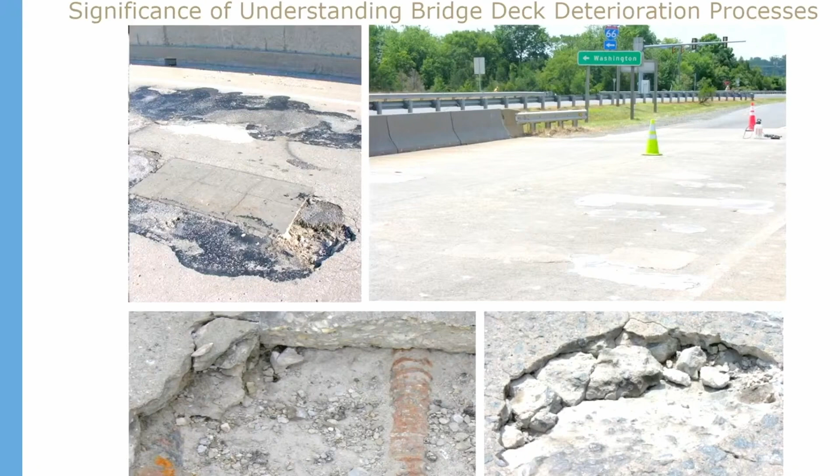So the first question we can raise is why it is so important to understand performance of concrete bridge decks. First of all, because of their direct exposure to traffic and environmental loads, concrete bridge decks deteriorate faster than all other bridge components. Those who are the owners of bridges know how much money they are spending for proper management of concrete bridge decks.

The second reason why we are conducting this research is that the relationships between the performance of concrete bridge decks and many factors listed here are still not fully understood, and we have not developed correlations which could help us in better bridge management.

So the question is, how can we develop better understanding of the performance of bridge decks, not by waiting 30 or 40 years on real bridges, but in an accelerated manner. This is what I will be discussing today.

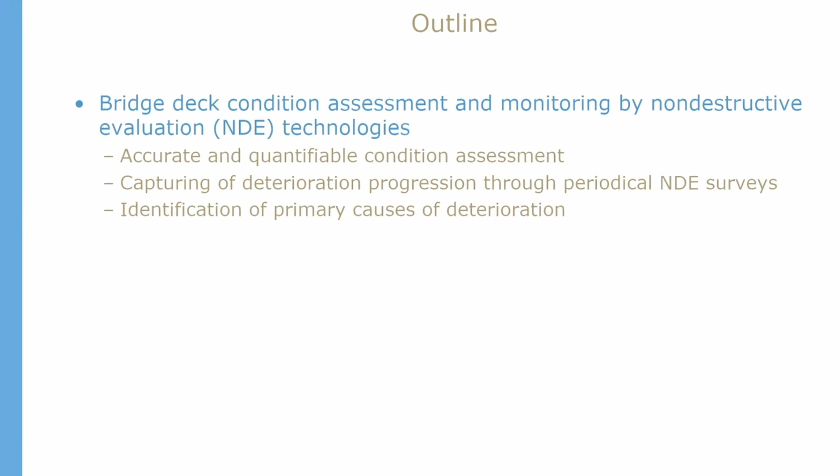There will be three parts of my presentation. First, I will describe how we are doing condition assessment and monitoring of concrete bridge decks using non-destructive evaluation technologies, which are essential to describe the results from accelerated testing. The second part will describe the BEAST facility for accelerated testing. Finally, I will go through the results obtained from testing both the deck with overlays and the bare deck.

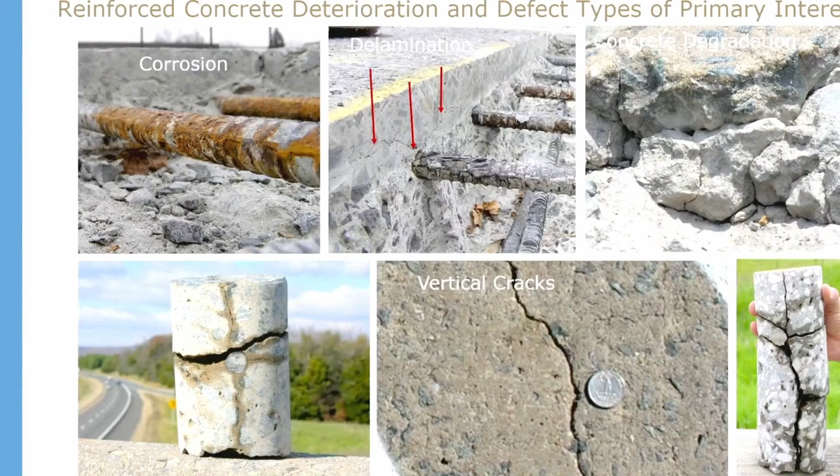So a little bit about how we use non-destructive technologies for condition assessment and monitoring. When we speak about what concerns us with concrete bridge decks, or any reinforced concrete element, these are issues related to corrosion, delamination, concrete quality degradation, and cracking.

To illustrate that they work, here's an example from a long-term bridge performance program we participated in. We collected data on one bridge in Virginia, which we surveyed 4 times within 6 years.

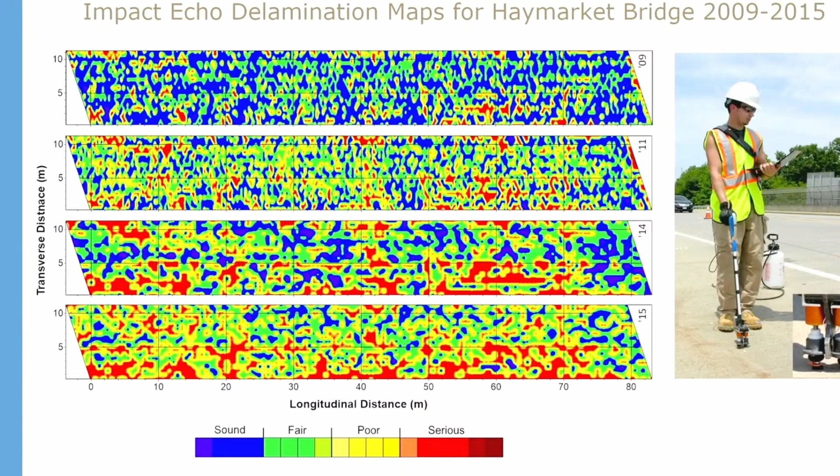Below that is the delamination map. We can say that the primary driver in this bridge was corrosion. But what you're going to see from our results from accelerated testing is that it was not corrosion, it was really concrete quality degradation as a result of repeated live loading.

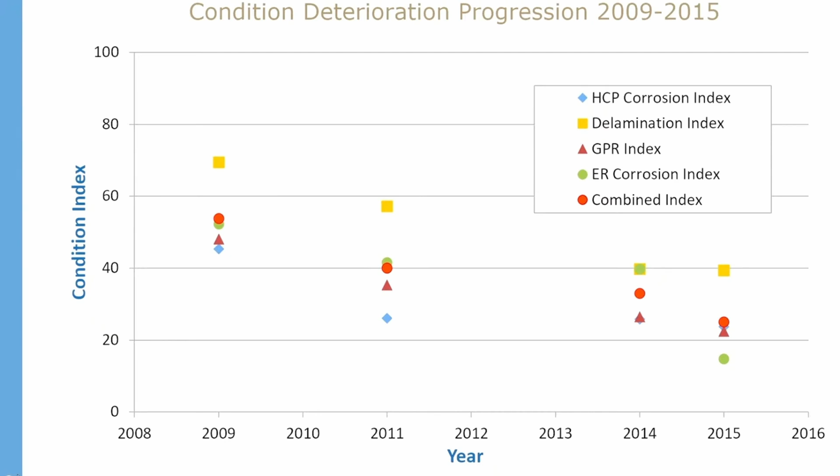So how can we use this information? We can quantify it, and that's the big advantage over visual inspection. For example, we calculate condition indices on a scale of 0 to 100, where 0 is the worst and 100 is the best. This condition index represents a weighted average of the percentages of deck area in different conditions. So for each technology, we calculate a condition index. If you look at this plot, from 2009 to 2015, each of the technologies is capturing the change in condition.

So what I've shown you were the data only for those 6 years, but we always have to think about the life of the bridge. The life of this particular bridge started in 1979. So we don't have any information between the birth of the bridge and when we first tested it in 2009. So there are a few questions we can raise.

The first question is, was it really the initial condition something that deserves a condition index of 100? As you're going to see from our testing in the accelerated facility, it is not truly the case. And we also know this from some real bridges which we tested right after construction.

The second question is about the shape of the curves as shown here, and that's what is missing. Here we can be a little more comfortable because we have those four measurements. But if you conducted only a single measurement, you would probably ask, I don't know how to get from the start to that point.

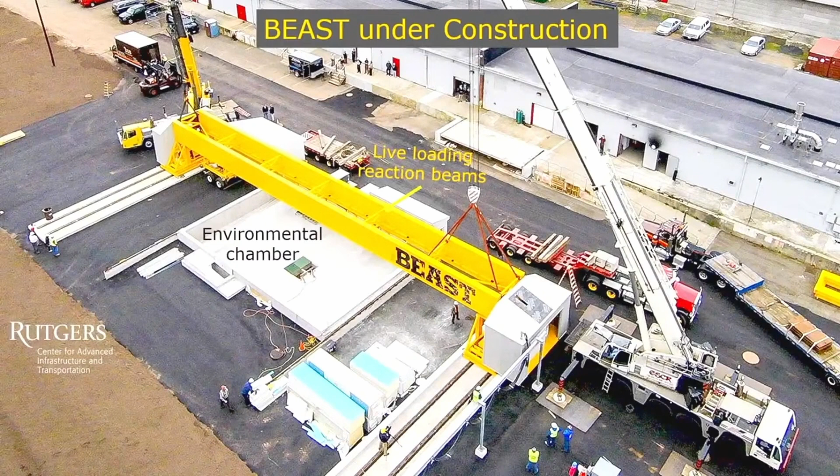So let me speak a little bit about this facility, BEAST. BEAST stands for Bridge Evaluation and Accelerated Structural Testing. Here you can see it under construction, and I'm showing this because it helps me better explain what you do there. First, what it can do: it can accommodate structures 50 feet long, about 28 feet wide, and about 5 feet deep.

You can apply dual axle loading, which can apply loading up to 60 kips. We typically run at 50 kips. And it can do up to 17,000 cycles of loading per day.

You can also control environmental conditions in this environmental chamber, marked here, where the structure is placed. You can control temperature anywhere from 0 to 104 degrees Fahrenheit, and you can simulate winter maintenance by spreading salt brine, which is what we do.

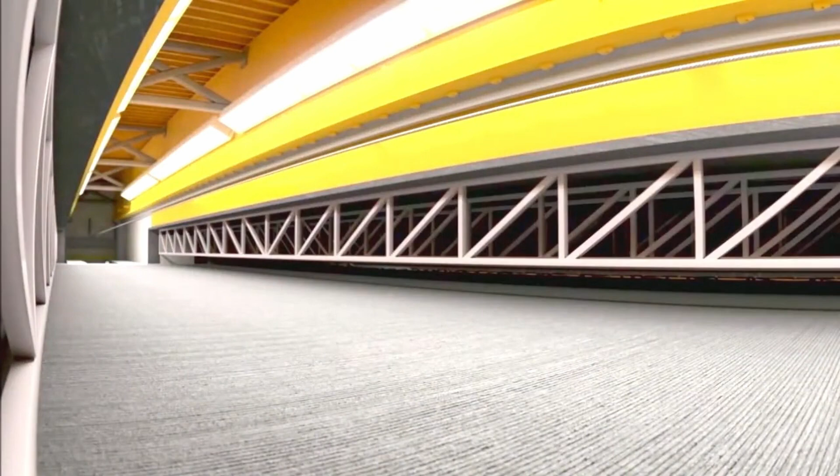To illustrate how this works, we'll start with an animation and then go to the actual bridge. The structure can be prefabricated and just placed into the environmental chamber, or it can be built in place. Our very first structure was built in place. Once it's in place, the chamber is closed, and there's a carriage which moves, approximately 10 to 12,000 times per day.

What's also being done simultaneously is we cycle the temperature. We need to go to about 0 degrees to cause freezing of the bridge deck, and then if we go up, we can go up to 80 degrees. But the goal is to bring the temperature of the deck back to about 40 degrees Fahrenheit. Here you can see the change in temperature, right now heating. As you apply more cycles, you can expect some deterioration.

In a second, you're going to see the carriage, the real carriage, not through animation, and you'll get approximately the feel for how fast it is. So this is the facility. This yellow part represents a reaction beam, and that dual axle load carriage moves along that axis. This white part represents the environmental chamber, and in a second you'll see an open chamber with the carriage running.

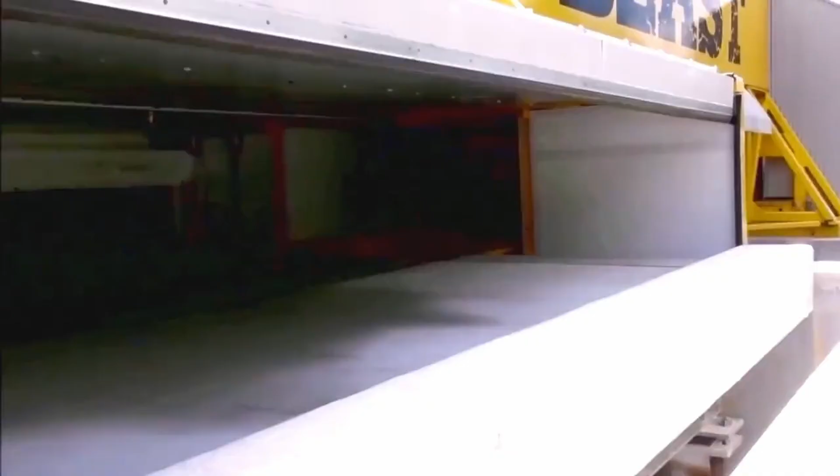So 10 to 12,000 cycles with a certain load. What you're going to see at the end is what we did. We're collecting information about the condition, so the environmental chamber is fully open, and then we deploy a suite of NDE technologies and collect the data. The data is being collected on a grid, 1 by 1 foot.

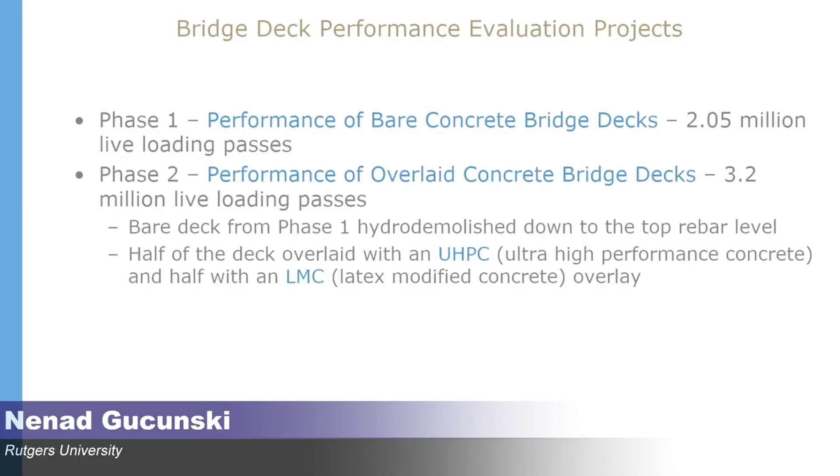So let's speak about the results we obtained on both bare and overlaid concrete bridge decks. We had two phases of testing. In the first phase, we tested a bare concrete bridge deck, which was put under 2 million passes of live loading. In the second phase, which is still not done, we will probably go up to about 4 million passes. The original bridge deck was hydro-demolished to approximately top rebar level, and on one half it was overlaid with UHPC, and on the other half it was overlaid with LMC.

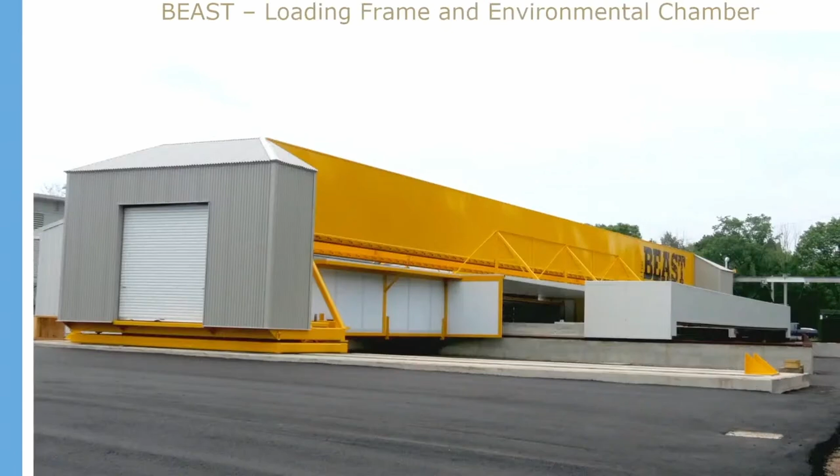The environmental chamber is closed once everything is in place, and that carriage is running.

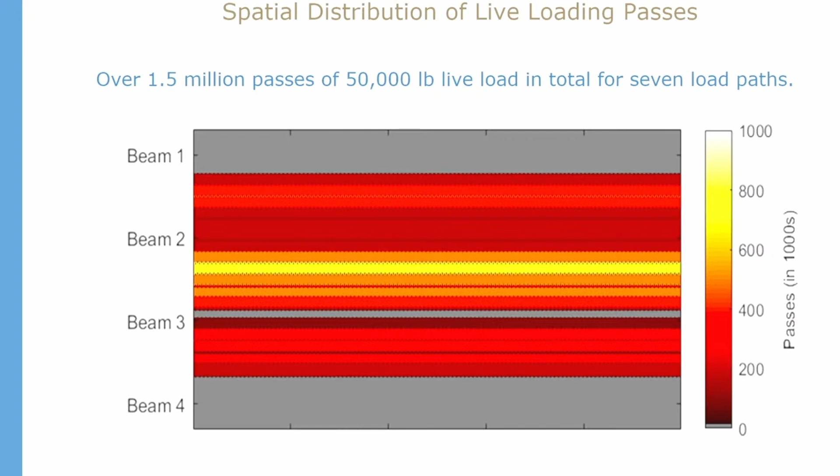That carriage is not moving in only one position. Here you can see that beam moving laterally, and you can see, for example, the distribution after 1.5 million passes. So pretty much, you may say, except for the edges, every part of that bridge deck experienced loading.

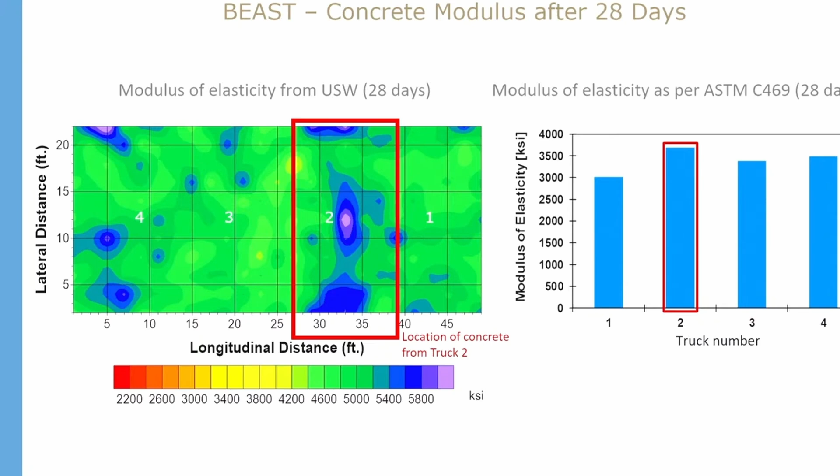So to go back to what I mentioned earlier, the importance of baseline measurements. For example, when this bridge was constructed, there were 4 truckloads of concrete, marked 1, 2, 3, and 4. We took some cores and measured their modulus, but we also used a technology, ultrasonic surface waves, to measure modulus of concrete. What you can see is significant variability in that modulus, but there is good correlation between what was measured on the cores and on the deck itself. So don't expect that you will have uniform material.

Just to illustrate what we would do, for example within phase 1 for the bare concrete deck, we conducted about 15 NDE surveys. I'm showing some of them to show that we are capturing the changes. For example, in this map, you start seeing these yellow zones at 360 days, low modulus - we know from previous experience these are actually signs of initiation of delamination. And that really happened, so those zones, which are in red, later delaminated.

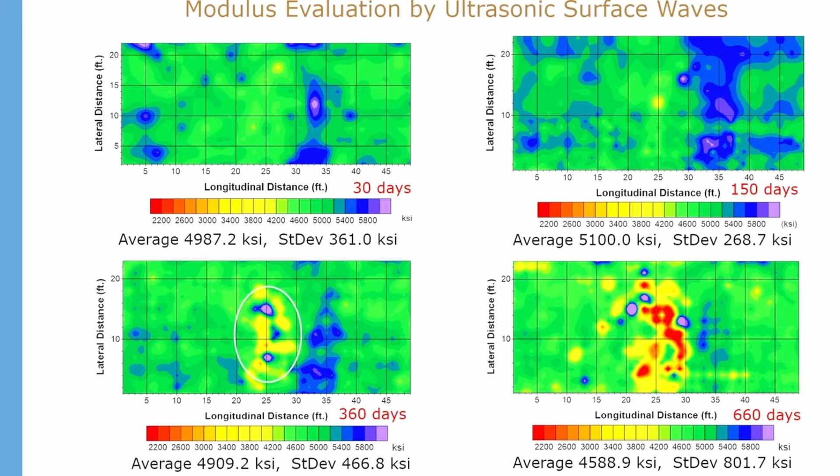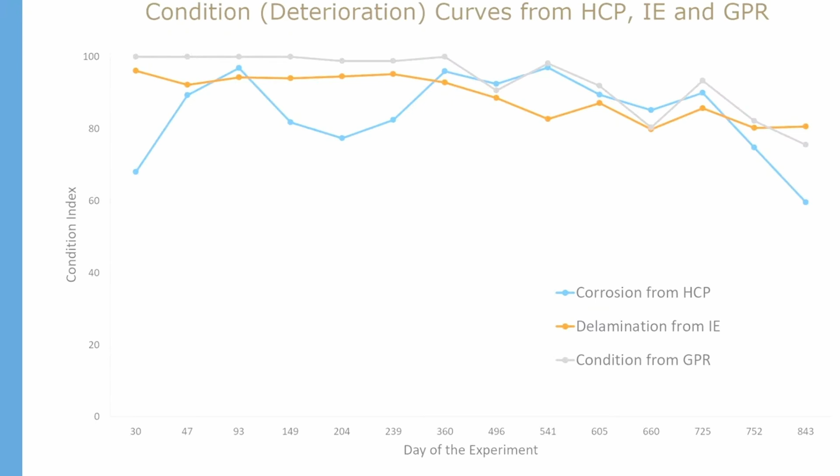Here you can see, for example, some degradation curves for the bare deck. What we can see is the general trend - we did not want to go too far because we wanted to use the same bridge deck for the second part, phase 2, evaluation of the performance of overlays.

What is always important to do is to compare different segments, and this is what we have done in the past, whether it was a big bridge where we segmented it to evaluate and provide assessment of different parts, not just the whole bridge, or if there were multi-spans.

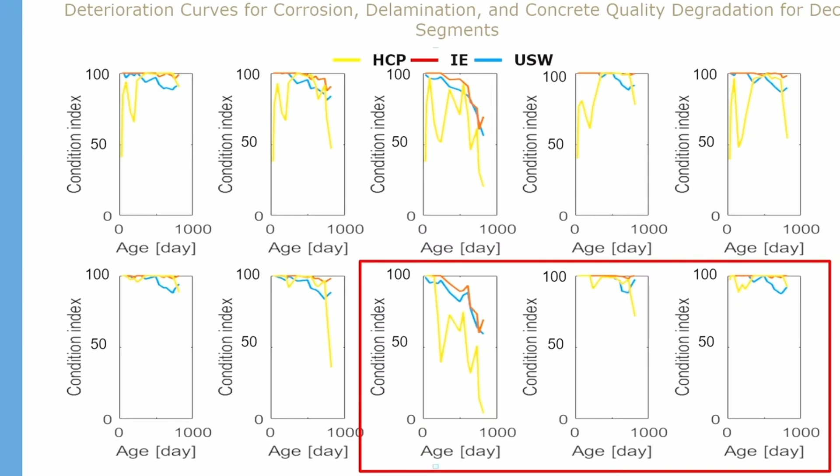Very similar for concrete quality degradation. We are using 2 measures: the first one is the change in average concrete modulus, and the other, even more important to detect concrete degradation, is standard deviation. If you look, there was a significant drop in the average modulus, and equally a significant increase in standard deviation of that modulus. These are clear signs of concrete quality degradation.

Now let us compare the results of the bare deck to the deck with overlays. On top you can see the image of that bare deck after 2 million live loading passes. At the bottom is the image of the deck with 2 overlays after 2.6 million passes. As you can see, while you can observe spalling on the bare deck, there were no signs of spalling on the overlaid deck.

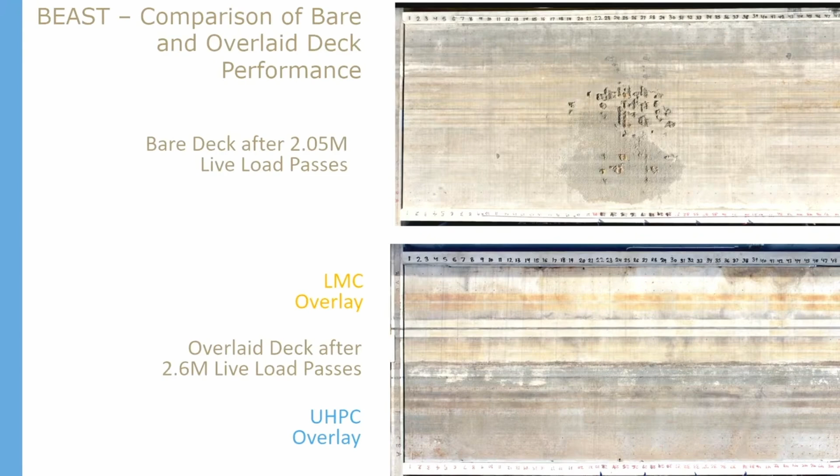Some might say it could be primarily a result of a thinner concrete cover on the bare deck. Well, we measured also on the overlaid bridge deck, and that overlay's concrete cover was maybe 0.05 inches thicker than it was on the bare deck, so they have pretty much the same conditions with respect to concrete cover. Here are just some comparisons.

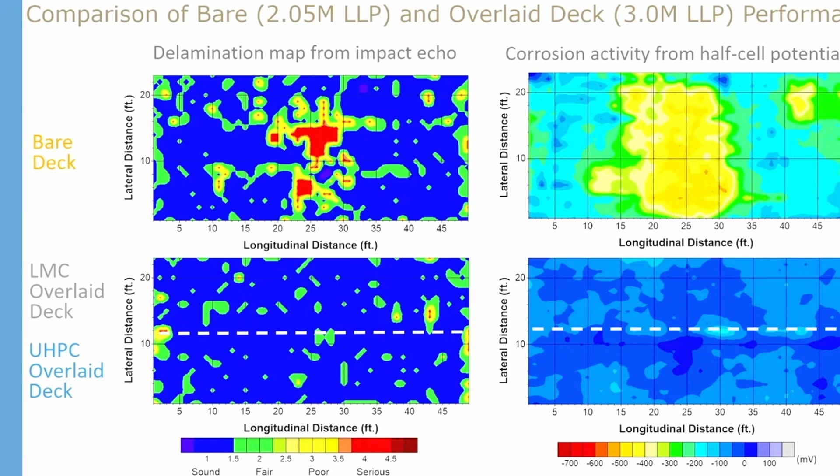On top you can see, for example, the delamination map from Impact Echo and corrosion activity map from half-cell potential. The top two maps are for the bare deck, after 2 million passes. The bottom two plots are for the overlaid bridge deck with 3 million passes, so 50% more live loading passes. With respect to delamination, there are no signs of delamination in the overlaid bridge deck. Similarly, there are no signs of corrosion activity in the overlaid bridge deck.

The average modulus is very steady with very stable standard deviation, which I mentioned previously is typically an indication of concrete degradation - so it was very stable. On the other hand, when you look at the bare deck, that standard deviation was going up and the average modulus was significantly decreasing.

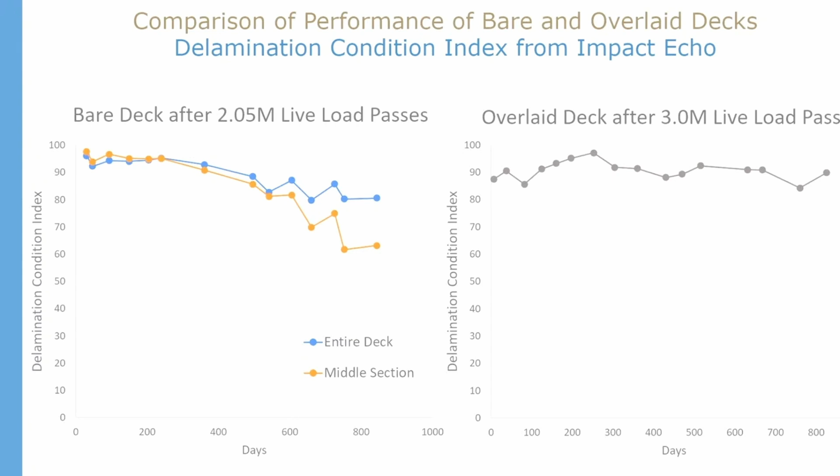So just to make a few conclusions: this bridge deck with overlays has shown significantly better performance than the bare deck, and even with 60% more live loading cycles, there was lower concrete quality degradation, and there were far less signs of corrosion and delamination.

This is in a way telling us that we should think about not just using these ultra high performance concrete overlays for rehabilitation, but that we might think about newly constructed bridge decks finished with UHPC.

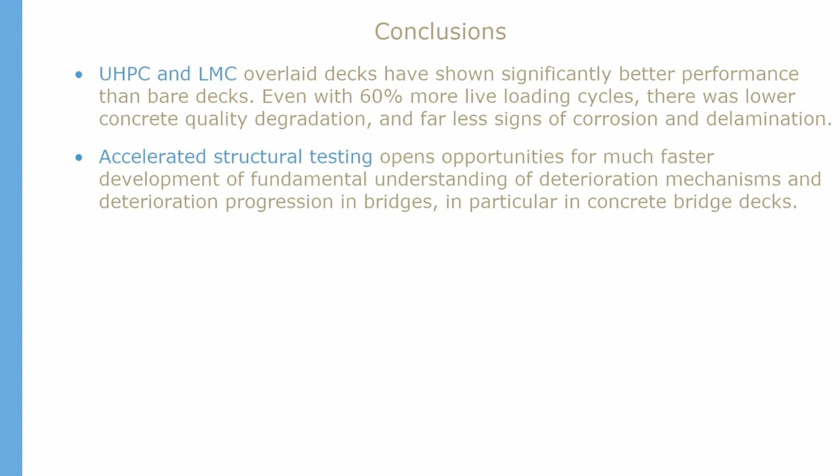What we have done is estimated with respect to live loading. We estimated that 1 year of operation of the BEAST facility would be equivalent to about 106 years of truck loading on that Haymarket Bridge in Virginia, which I showed at the beginning. So this facility dramatically accelerates testing, and we should use it to develop a better understanding of deterioration mechanisms and progression in bridges.

Something I mentioned is we looked into those equivalent load factors, and we estimated that we are accelerating real truck loading effect in terms of damage creation 30 or more times faster than what you would have on 90% of real bridges.

What is critical for better bridge management is that by having this ability to collect data, this puts us in a position to develop more realistic deterioration and predictive models, and ultimately use those in bridge management.

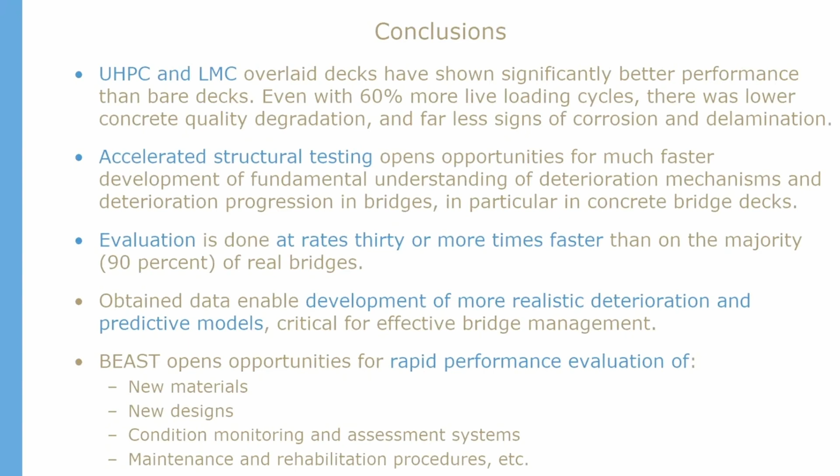While we have demonstrated here how we can use accelerated testing to evaluate performance of concrete bridge decks, the facility opens opportunities for so many other things, like evaluating performance of new materials, new designs, assessing performance and capabilities of different condition monitoring and assessment systems, and evaluating the effectiveness of different maintenance and rehabilitation procedures, and so on.

So I very much appreciate your attention, and I will be happy to answer any questions.

Yeah. Actually, I'm Avinash Prasad, Administrative Engineer from New York City Department of Transportation. I work for the Bridge Division, and I do bridge inspection. So I'm very excited about this presentation, the way it was presented.

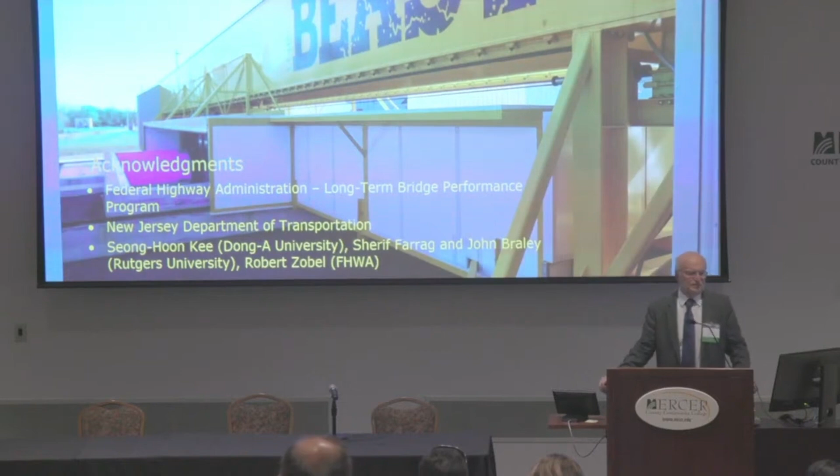My only question is about the way our bridge decks are deteriorating right now, and the kind of innovation your presentation has shown today - how cost effective will it be to make the transition into this, because even some new bridge decks that were installed, we are still going with the conventional bridge deck. So how cost effective will it be for our coming bridges, our coming bridge tops - can we think of doing this?

Well, I'm not in bridge management, but how I'm viewing it is you probably should look at different bridges depending on what the traffic amount is. For example, if you have a bridge on a highway with very high ADTT, and you know you will likely have to do some work on that bridge deck after 10 or 15 years, imagine what kind of benefits it would be if you could extend it to 25 or 30 years. So what we do in the BEAST facility, while we are changing environmental conditions, is primarily evaluating the effect of live loading.

Because for environmental loading, for example, when you speak about corrosion - it's not just that if you spray more salt brine you accelerate corrosion. Yes you will, but it's also a function of time. You have a function you have to integrate to get the cumulative effect, how much corrosion you are going to get.

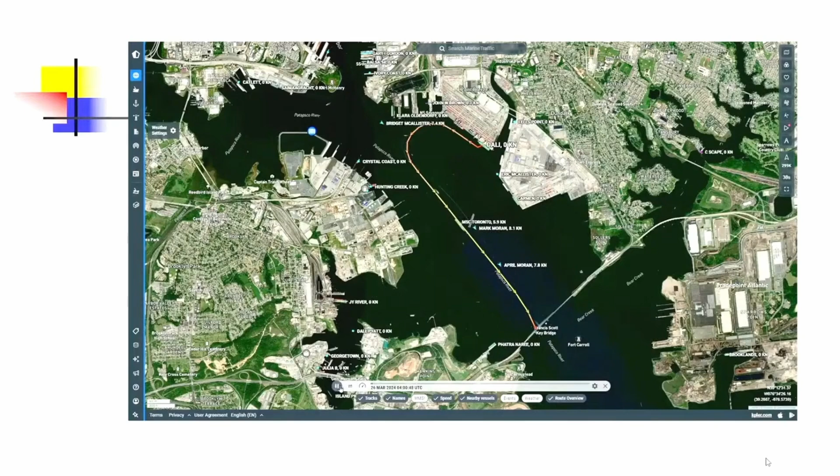But was this event a pure accident, or could it have been prevented? If you look at the history of bridge accidents in the USA, particularly bridge collapses because of ship impact, almost 50% of these incidents worldwide have happened in the USA - remarkable given how massive naval traffic is and how many bridges there are around the world, yet a majority of these collapses occur in the USA.

Let's see what really was the cost of this collapse: at least $1.5 billion for the rebuilding cost of the bridge. If you look at the economic loss, assuming 11.5 million vehicles per year, you're looking at close to $9 billion in losses. There are 4,900 trucks which now have to do a 30-mile detour, increased accidents, air pollution, loss of use of the port facility, loss of business. Altogether, the estimated cost is close to $20 billion.

In terms of container capacity, you've seen those 20-foot containers. Dali could carry 10,000 containers. The largest ship right now can carry more than 20,000, even 25,000 containers.

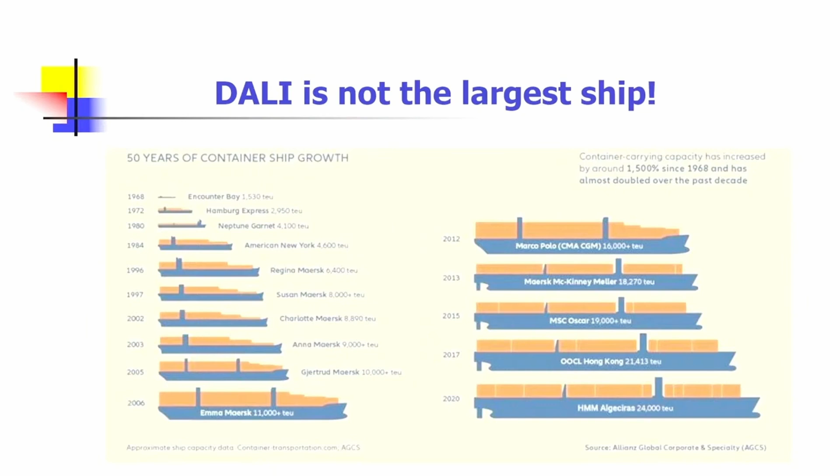In terms of weight, we know Dali was 116,000 tons, but the real weight, which is what matters to us, was actually 150,000 tons, because that DWT figure, 116,000, is just the capacity to carry containers. You also have the weight of the ship itself, another 20%. So if you add everything, we're at 150,000 tons.

That ship, when it impacts, applies a force of 50,000 kips on a structure. It's a massive force. But was that the only accident?

Well, just two months before Dali, on January 29, 2024, a ship called Ship and May collided with the piers of a major bridge, the Zarate-Brazo Largo Bridge, in Argentina.

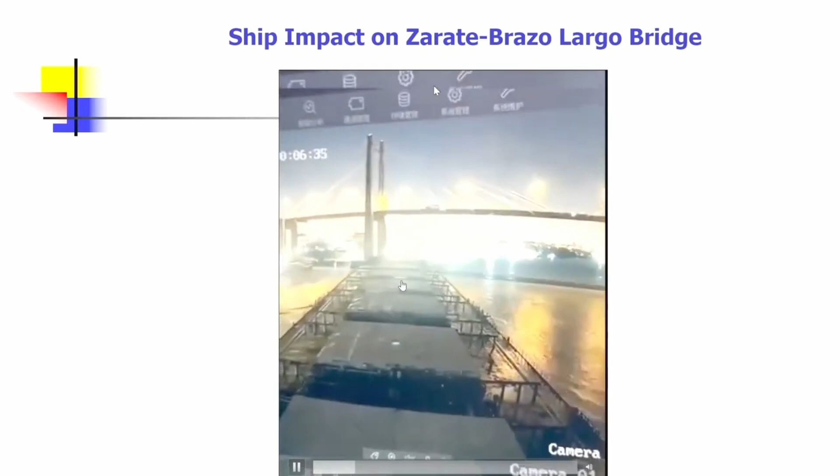You can see the bridge there, and the ship goes and hits the pier. But fortunately, it did not hit the pier directly. Around the pier there was a pedestal, and the ship got stuck in the pedestal. The pedestal pierced right through the side of the ship, and the ship got stuck.

The bridge did not collapse, although the impact force was almost similar to what we had during Dali, which really tells us that around the Maryland bridge, if there had been a platform or protection, a fender, what we call in bridge engineering, the bridge would have survived. We would have saved $20 billion, and we would have saved those people who died there.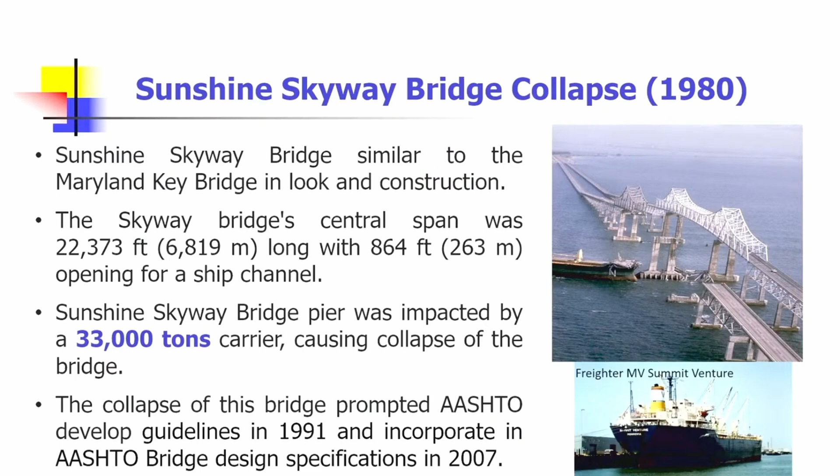How are we progressing? Well, the whole research on ship impact on bridges started after the Sunshine Bridge accident, very similar to Key Bridge. The Sunshine Bridge was impacted by a 33,000-ton carrier, the bridge collapsed, and it led to research on ship impact. AASHTO had massive activity, and finally in 1991 we had a code in AASHTO that could account for ship impact on bridge piers.

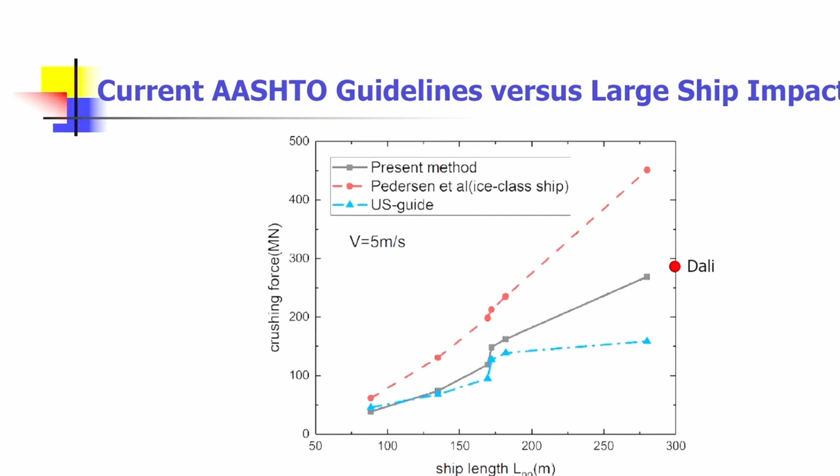The Dali ship was here. The big difference is in the crushing force. The reason is because we calibrated our model based on the barge impact and all those things from the 1980s accident, and it's really based on load capacity up to 30,000 tons. So in this region of 30,000 tons, we have pretty good matching, with some margin of safety.

We are pretty good here. The time we get out of this domain, this starts shooting up because there's more and more crushing of the ship, and the weight and length increase. So the whole picture starts changing about what really is happening.

Other aspect is that AASHTO really requires the engineer to calculate the annual frequency. This annual frequency is meant to calculate whether you really need to protect this bridge. Now imagine, key bridge, $1 billion worth of bridge, which could inflict damage worth $20 billion.

And your repair cost or protection cost would be something like $60 million. Would you even go and calculate this probabilistic thing to see whether I need to do something or not? It's understood that if your asset is that expensive to such impact, you just put that $60 million, put a protection, and sleep peacefully knowing your bridge is going to be safe.

So AASHTO calculates this annual frequency of collapse, which is a function of annual traffic. This is vehicle aberrancy, like when you lose power, the ship goes out of control - what is the probability of that? PG is the geometric probability - you have this big channel width, and depending on how the ship goes and how far you are from the pier, your probability changes.

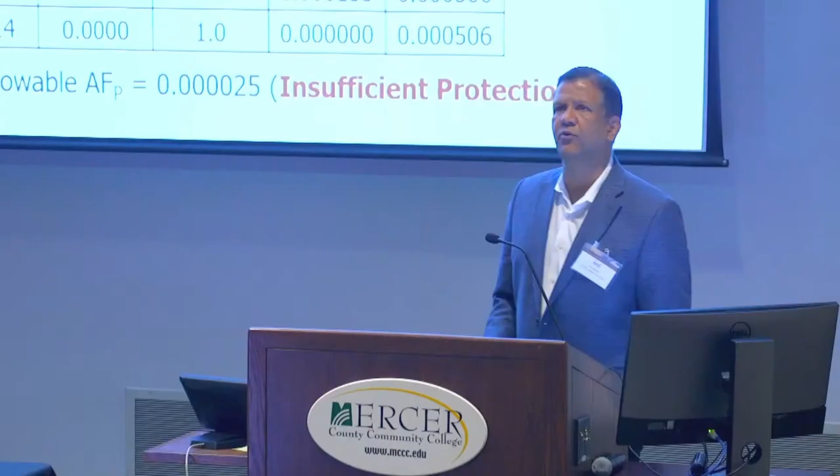So it looks like you would have been required to do some protection. But that protection would not have been so extensive that it would even protect the bridge from a 150,000 ton ship. If you did protection and decreased this frequency, you would have improved it further - maybe from 20,000 you would have gone to 30,000 or 40,000 kips and protected the bridge. But still, with a ship like 150,000 tons, your impact force is 50, 60, or 70,000 kips. So it will not protect.

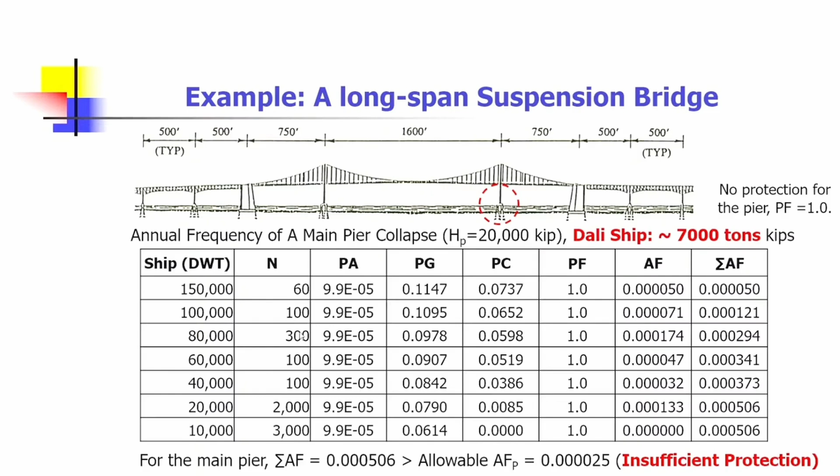But for instance, let's say I went and changed this frequency - just playing around with fictitious numbers - that you have a lot of small ships coming, and mid-sized ships coming. But one day out of the blue, since the port has the capacity, one Dali ship came one day and it went out of control.

It's possible. When this collapse happened, we had the World Trade Center collapse happening - these are very, very small probability events. This can happen, but the point is, if that happened, are we willing to take the risk?

So let's say if I had one Dali ship coming one day, out of the blue, went out of control, hit the bridge pier, and caused a loss of $20 billion. When your repair cost is only $60 million, are you willing to take that chance?

Because if you do this frequency calculation, what it tells you is that your current pier was good. You have the same pier at 20,000 ton kips, and your force from the Dali ship is 70,000 or 60,000 kips. But still, your calculation is showing that, yes, you don't need to actually do anything.

That's absurd, because now we are completely relying on some frequency, some freak chance that in future a ship double the capacity of Dali might come one day, go out of control, hit an important bridge, cause the collapse and cause really massive loss to the economy. And if we didn't detect in time, if the traffic was not stopped, a lot of people would have died in the collapse. So it's weird that we rely for such an important structure on the calculation of the frequency of failure.

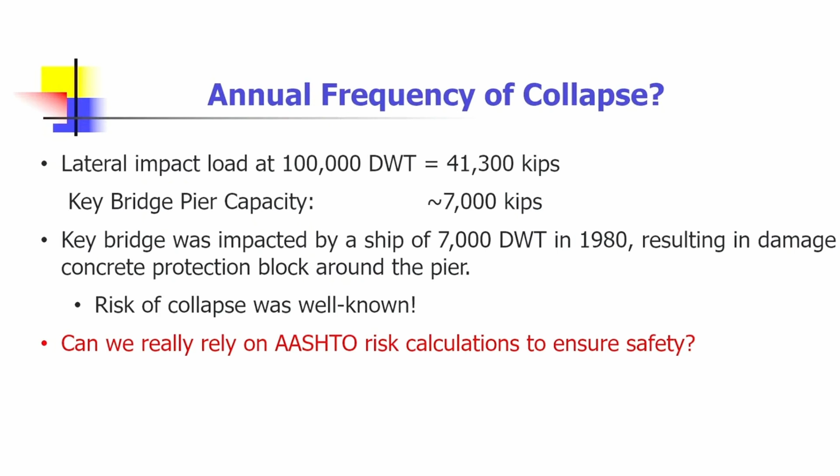Again, I showed you this already, that if you have this kind of scenario, that a freak accident happens where something comes and hits a bridge pier, are we willing to take the risk when our mitigation cost itself is so small compared to the risk that it will cause massive damage? So what do we do?

Well, we have been doing work on bridge fenders. Any DOT will know that when we have bridge fenders, we do this test. We do crash testing, we do crash simulation. In my last 10 years, we have done a lot of these crash simulations on bridge piers, trucks impacting bridge piers, where we developed the guideline which is being used by Federal Highway and many DOTs on how to design bridge piers for impact.

And this is very definitive that we can actually say this is our risk, a 150,000 ton ship. And I want a performance, not necessarily by making the pier strong, but pier and surrounding fenders, the rock island, or whatever you can do around it, which will not cost you so much but will still prevent the ship from going to the bridge. And you can design that.

So we started looking at how to do it. In the last 6 months, we created this model of the ship, called the Dali ship. It's a Neo-Panamax type of container ship. It's a finite element model, not just rendering or drawing. It's a finite element model.

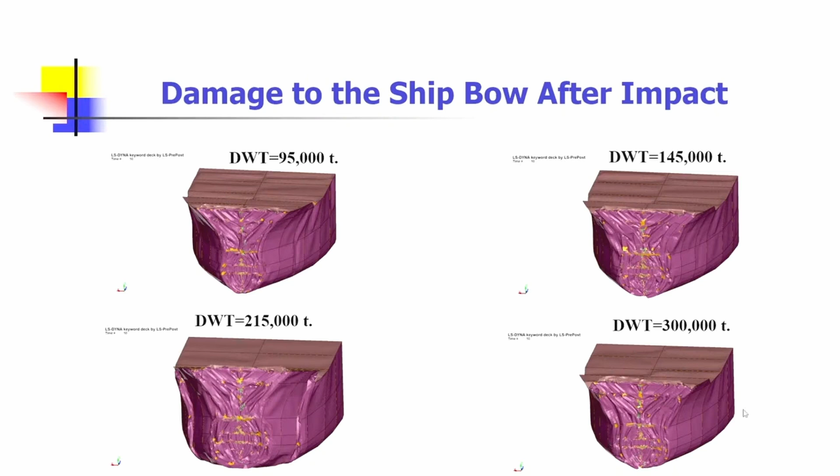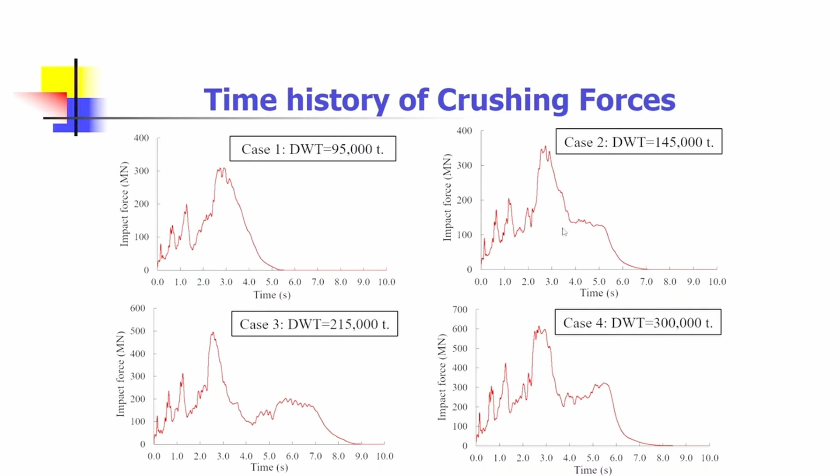You see this portion, this front of the bow will crush, and then the crushing will extend through the bow. You can see that this all crushed, and you see different peaks. They will come in different parts. And at some point when it's crushed completely, the force will drop. The ship will keep on hitting the pier or wall, and at some point it will come to rest, and the ship will recoil back. That's when the force goes to zero.

But if you go to the AASHTO code, it will tell you to just design this for 30,000 kips. So you have almost an order of difference, that AASHTO is telling you 30,000, but the actual impact could be more than 50,000 kips. So that's the challenge we are looking at.

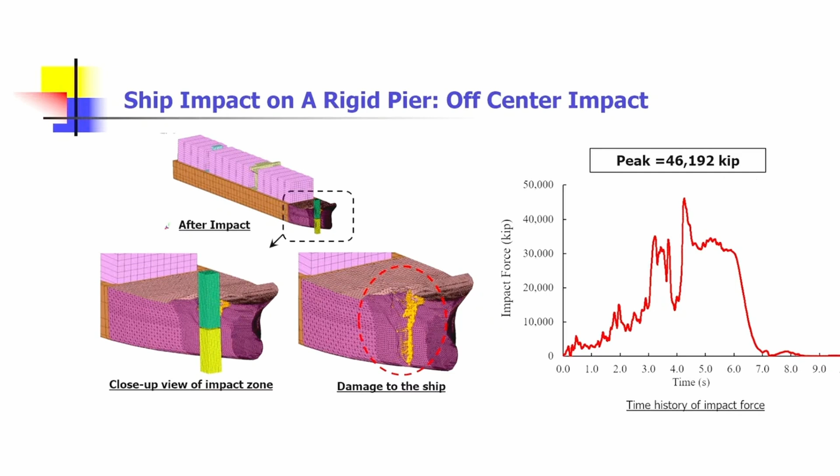In this case, the force will be 46,190 kips, but if you go to the AASHTO code, it will be even lesser than 30,000 kips. So the discrepancy is much bigger when you have the side impact.

So what does this really mean in terms of protection of bridges? Well, we applied this to a suspension bridge model, an existing bridge designed before the guideline for ship impact came into picture in 1991. This bridge was built in the 1960s, a major suspension bridge. We built a very, very detailed model. Again, we didn't build this model now this year. We have been working on long span bridges for a long time.

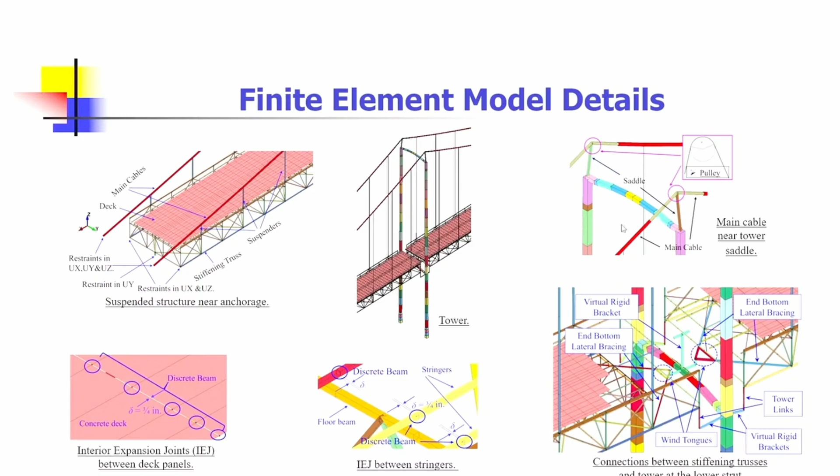So this was a model we had built previously, and this model is as if you are building every element of the bridge. The deck, the cable, everything is built as if we are taking the bridge apart, and piece by piece we are building the final model, which basically replicates quite accurately the real behavior of the bridge.

So this is the bridge, and what we do is we say, okay, this ship will go hit the tower at the center impact with the same velocity as the Dali ship, 6.8 knots. If we look at the tower, this is the long suspension tower, this is the impact zone. After the impact, we get the displacement, and we say the tower will get damaged by 4 feet. Looks like a big number, but the tower is very tall. So we go and do the analysis of the tower, trying to find the plastic rotation of the tower. Yes, the tower is severely damaged, but the bridge is intact.

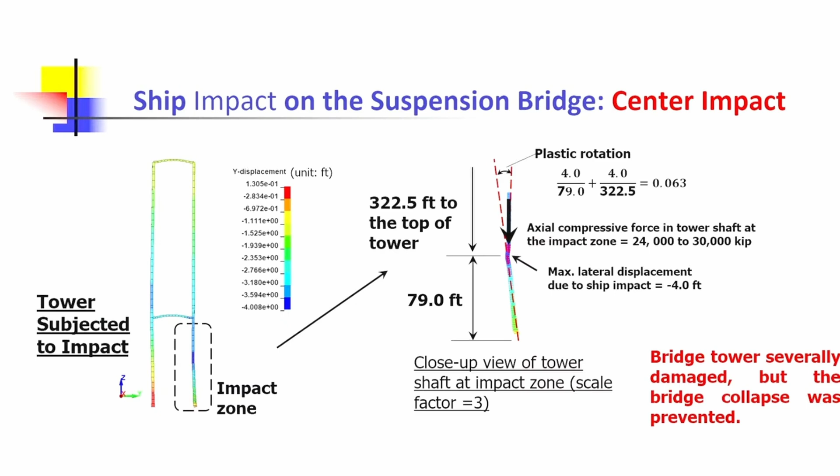It didn't collapse, because suspension bridge towers are subjected to a massive amount of compressive force, and by virtue of this compressive force, the sections are bigger, very big, and they have a lot of shear capacity. On the other hand, for the Key Bridge, the tower was just supporting the weight from the truss, so the towers, probably piers, were not as strong as the suspension bridge. The same goes for the cable-stayed bridge.

So the next case we look at is the off-center impact, where the tower is not really in line with the ship, slightly away from the ship, like what happened in the case of Dali. And then we do the analysis. And now you can see that this was the actual Dali ship damage here.

A lot of cargo is here. But if you look at the overall damage to the ship, again, we don't have information, just the pictures. Based on the pictures, when we go into the finite element analysis, we can take it layer by layer and see how deep the damage was. We see the damage in both cases is quite similar. We cannot calibrate exactly because these are incidents with so much difference in impacts and all those things. But the damage is at a similar level to the actual Dali ship, which gives us confidence that the simulation is quite realistic.

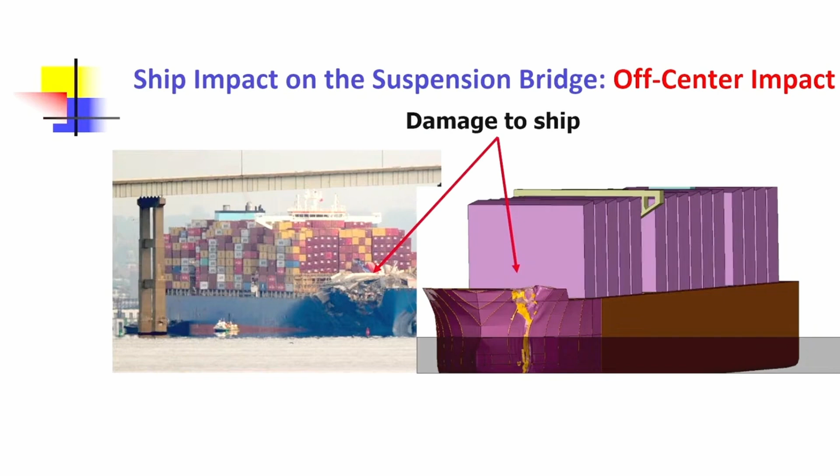We have to design these impacts not with a factor of safety of 2 or so, but much higher, because ships can vary in dimensions, stiffness, size, and all those things. Given that variability, we need to have some factor of safety.

So what do we do? Well, there will always be a bigger ship. Look at the history, 33,000 ton DWT for Sunshine Skyway to approximately 150,000 ton for the Francis Key Bridge. Will this be the last one? Can we really limit the naval traffic, the ship operators, to use a smaller ship? No. It's the economy of size, they will keep using bigger and bigger ships as long as they can make money. It's our job to protect the bridges, and we do.

What is the design philosophy? Well, not one thing. We design the bridge piers for minimum resistance because there's no point in putting a lot of lateral resistance on the bridge pier, it's going to be unused capacity. We can deploy supplementary protection systems: barriers, raised concrete platforms, islands, rock walls, energy absorbing fenders, a combination of these things.

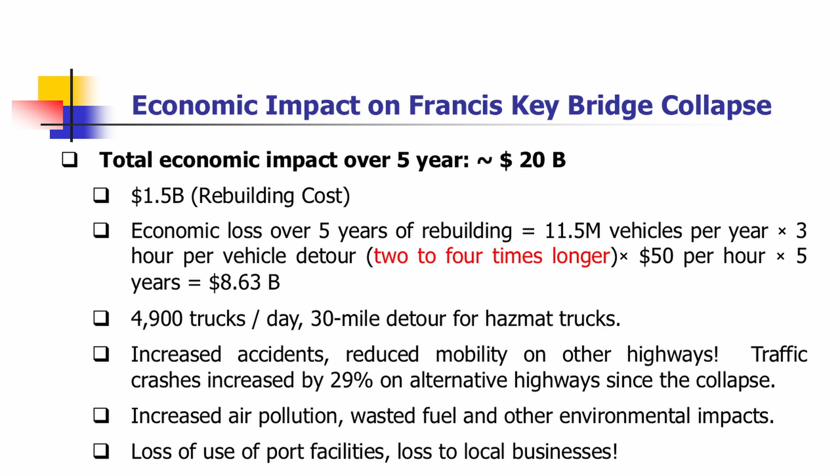And we do this all the time. When we have trucks, we design fenders and put them around piers on highways to make sure trucks don't hit the piers. So why can't we do the same thing for bridge piers? And we have, at this point, the technology and simulation to simulate exactly what you need, so we can develop a performance approach. In fact, all this I'm showing you is actually a performance approach.

You can design for no damage for a low-level event. But if in future a ship 2 times the weight of Dali comes, or 3 times the weight of Dali comes, then at least you want your protection system to be damaged, but the bridge pier will not be damaged.

Now you can assess the performance with meaningful acceptance criteria. Why do we say this? Well, long span bridges have very high value, very high consequence. We can design for the maximum credible ship. There will be future increases in size, current capacity, and need to increase capacity in the future. But one thing is, we need to guarantee the safety in absolute terms. We cannot just say that probably this will happen, because this structure is too important, there will be loss of life, there will be massive consequences. The consequences will be way beyond the cost needed to prevent them.

By the way, if you didn't know, the Francis Key Bridge was not the first time it was hit by a ship. In the 1980s, the bridge was hit by a smaller ship, 7,000 tons. What really happened, and you might have heard the news, is the bridge pier had some kind of concrete fenders around it. In the 1980s, when that 7,000 ton ship hit the bridge, that concrete fender was all crushed, all damaged. That was a warning sign that this bridge was likely to be hit by a bigger ship.

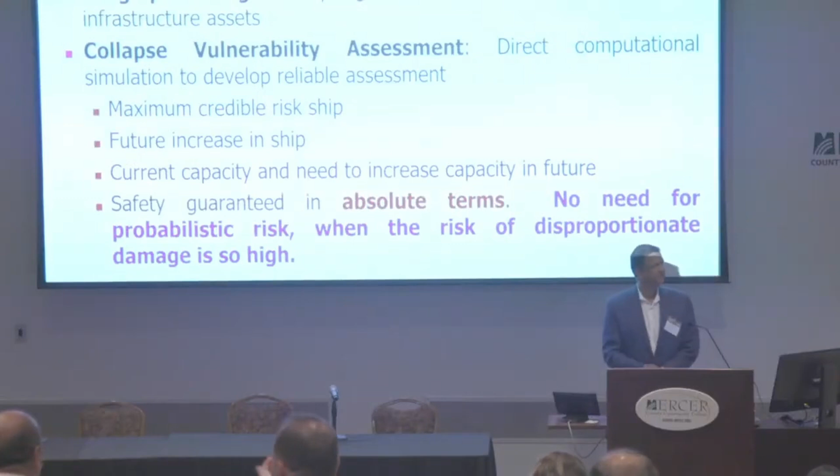So for all the bridges, how do you warrant that we need the concrete fenders or we need the concrete walls? Or is it just for some bridges? Well, like I said, if you look at my last slide, you don't really need a concrete wall everywhere. If you look at some of the bridges that people are working on now, you have Rock Island. Rock Island is very simple - you have the bridge pier, you create this barrier and fill it with rocks, so when the ship comes, the bow of the ship will actually get stuck in the rock.

All right, so I'll rephrase it. So how do you warrant it? Does every bridge need that protection around the pier, or do you have some criteria? Your criteria is very simple - if you look at the size of the ship that is coming, and knowing that a ship can go out of control anytime - there's a certain frequency, but you don't want to rely on that frequency - you ask, what is the max size of the ship?

And also, when you want to do repair, you don't want to do the repair for just 5 years. You want to do repair for 10, 15, or 20 years going forward, looking at the life of the bridge, so the bridge survives and stays there. So if you look at all the factors, you take what you call your maximum credible risk, and you assess the capacity, assess the environmental capacity, and if you think they are safe, then you don't need to do anything. If you already have protection - a Rock Island or fenders or something - then you don't do anything. But if you don't have those things, then you do need to protect the bridge and take action, because it's not like if nothing happens for 10 years, nothing will happen one day in the future. You don't want to take that risk for the one day in the future when a tragic accident might happen.

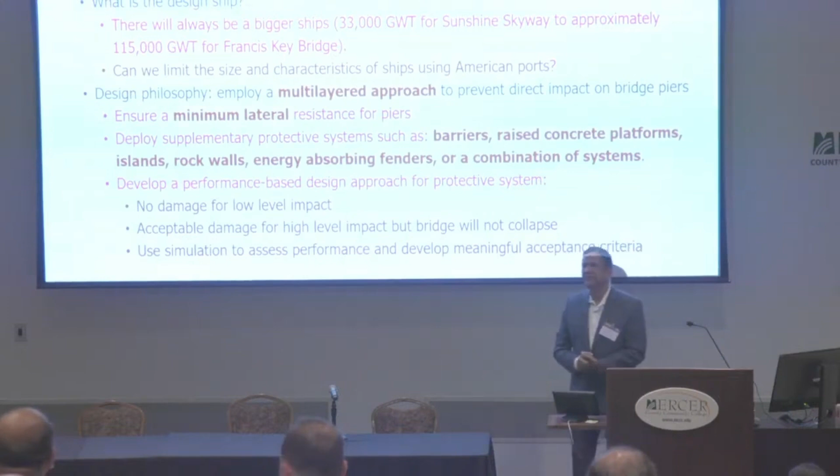Yes? I have a question. It dictates about everything for the substructure, like pier protection, fender system protection. Do we look into the superstructure, spanning, or whether certain kinds of superstructure will behave better in case of collision?

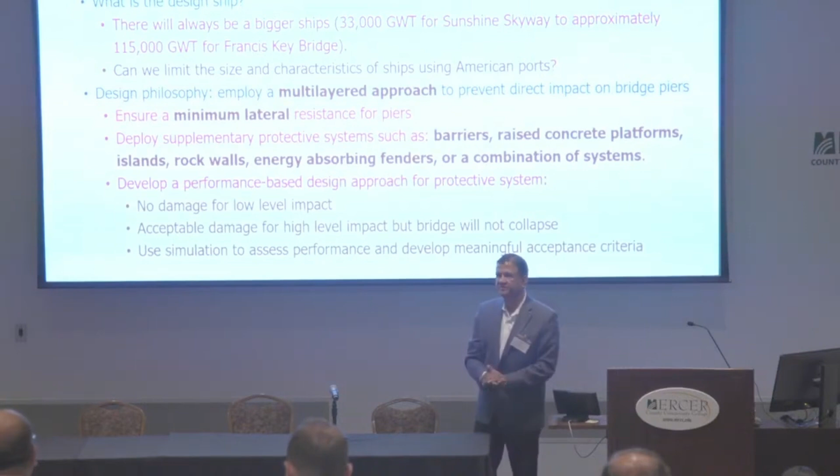Well, let me bring to your question something else. So you have two kinds of impacts on the bridge pier. One is when the ship might just come and hit the bridge pier - so you need to absolutely protect the bridge pier. There's another kind of accident which happened in China recently, where the ship was right in the channel, and the ship had something very high on top, and it went through and hit the deck, cutting through it. Well, we can't really do anything about that.

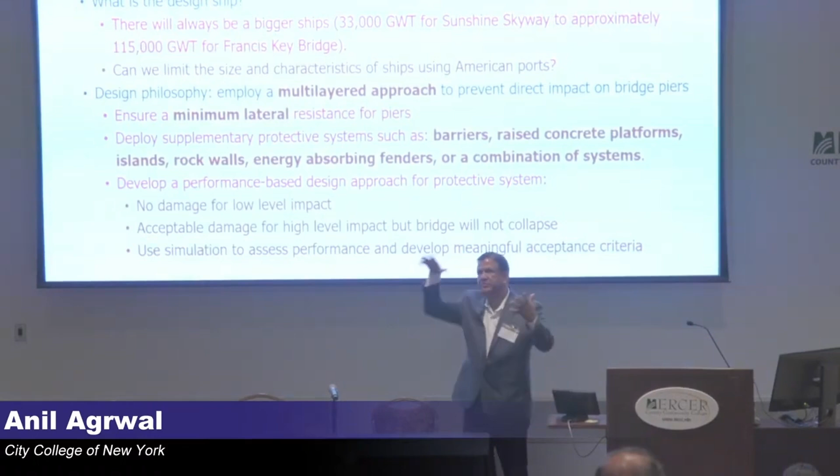Yes, we can do something - put some protection system before the bridge, so that when the ship is coming, at least you'll reduce the speed or minimize the damage, something can be done. But superstructure-wise, nothing as such. But if I look at the simulation that we have, when you have a suspension bridge, you have the tower, and when the ship hits, you also have the cable. These cables provide lateral restraint. So if you just take the tower versus the full suspension bridge with cables and everything, the suspension bridge with cables will give you larger capacity to sustain impact.

In the other case, there was not only one span, multiple spans fell at the same time, but only one pier got hit. That's a domino effect, a dynamic effect. If you lost one span, it's almost guaranteed that because of the dynamic shock and pull force and everything, you have complete dynamic instability in the system, where collapse of one pier will guarantee the collapse of the whole bridge.

No matter what you had, unless you had the spans completely separated and the piers completely independent, if one pier collapses, only that portion of the span will collapse. If the design was done carefully, they are okay. But if the spans are connected to each other with continuity, it's almost guaranteed that the whole bridge will collapse because of the dynamic effect.

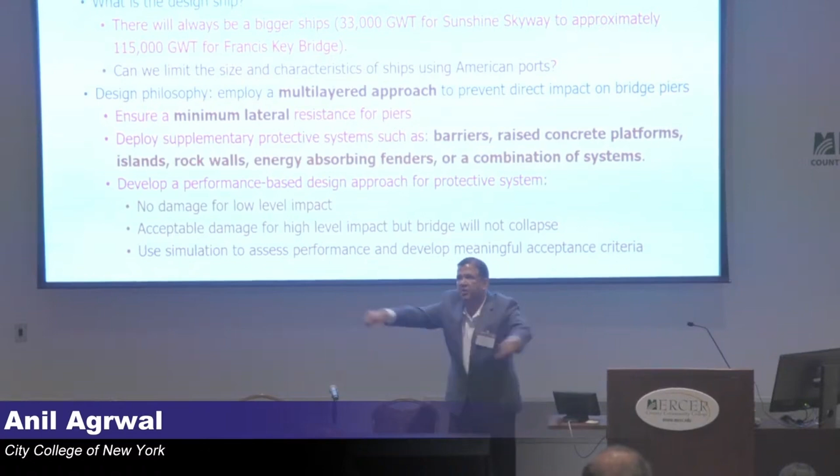But there's a major shock. When this pier collapses, there's a major pull to all the spans in this direction. Shouldn't we have some kind of span configuration like that not be continuous throughout the bridge? Why not?

I think it will be a lot easier to just protect the bridge pier. We put fenders or a wall or something to make sure the ship does not hit the pier, so the pier does not go through those massive impact forces, because there's no way you can design those spans and connections for massive impact forces.

A lot cheaper would be to not design the bridge pier itself for impact, but instead design the peripheral system around the bridge pier. So whether it's channel depth, a rock island, or whatever, you design the whole periphery around it such that the ship does not hit the bridge pier. That's the goal.

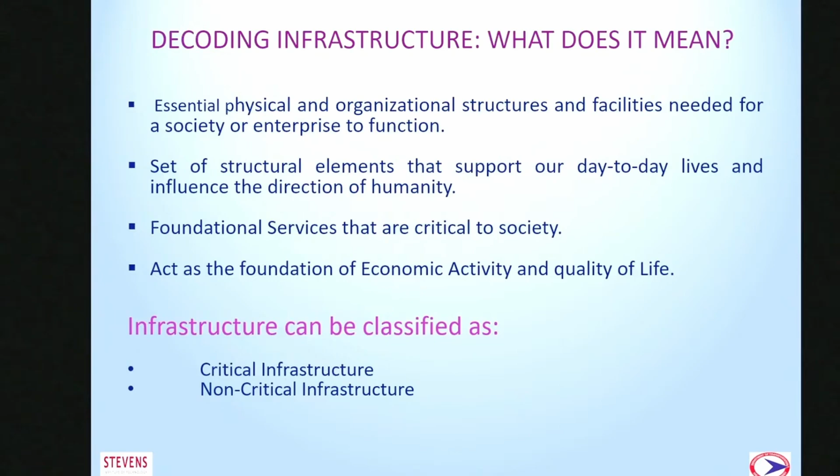Infrastructure can be classified as critical infrastructure and non-critical infrastructure. Critical infrastructure is a body of systems, networks, and assets so essential that their continued operation is required to ensure national security, public health, safety, and economic security.

According to PPD 21, we have 16 critical infrastructure sectors identified, which are really vital for our nation: chemical sector, commercial facilities, communication sector, critical manufacturing sector, dams, emergency sector, energy sector, information technology, government facilities, healthcare, transportation, and water and water resource sector.

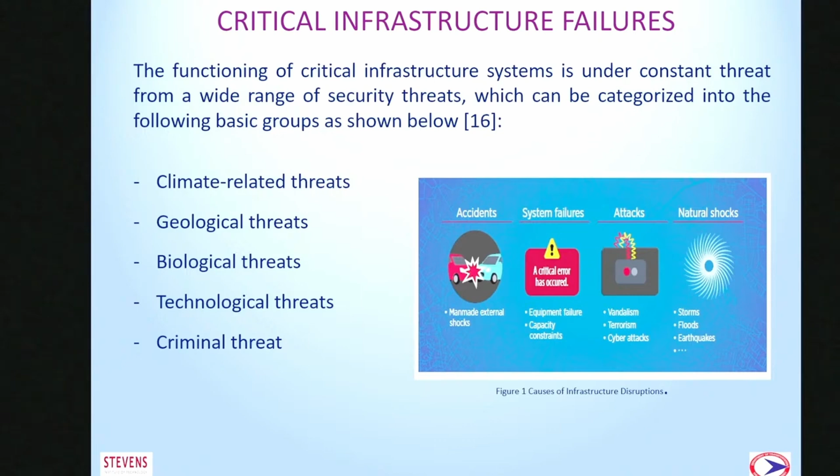So let's take a look at how critical infrastructures fail. The analysis shows we can categorize causes into a few basic groups. First, climate-related threats such as floods, hurricanes, and extreme heat; geological threats like earthquakes and landslides; and biological threats like pandemics such as COVID-19, as well as technological threats like communication failures and equipment failures.

And criminal threats such as terrorism, cyber attacks, and artificial accidents. All of these could cause disruptions.

The effectiveness of resilient infrastructure pivots on its ability to anticipate, absorb, or rapidly recover from disruptive events. Resilience ensures the continuity of services despite disruptions, and it also depends on contingency planning and effective infrastructure design.

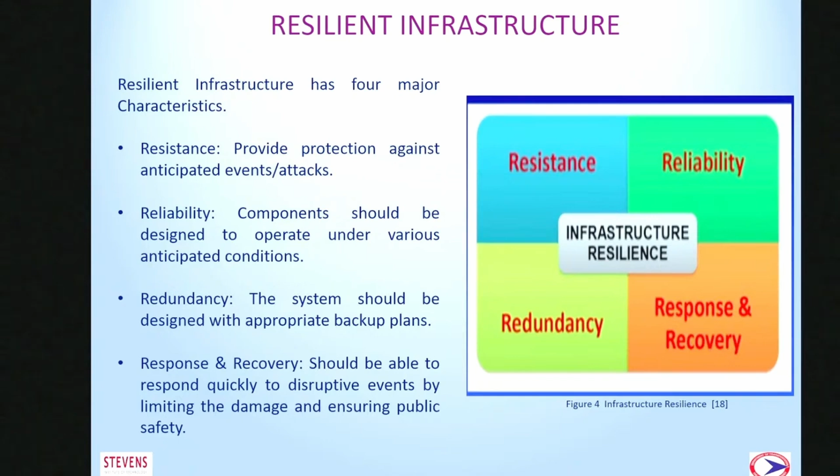So, resilient infrastructure, what does it mean? In summary, it has 4 primary characteristics: resistance, reliability, redundancy, and response and recovery. Resistance means protection against anticipated events and shocks. Reliability means components designed for various conditions. Redundancy incorporates backup plans. Response and recovery means rapid response to disruptions, ensuring public safety is the primary goal for us.

Next, let's take a look at infrastructure dependencies. These are very complex, making risk mitigation challenging. Most infrastructure elements heavily depend on power and communication networks, and their failure would dramatically impact local and global economies and society as a whole. Critical infrastructure functions as a system of interrelated systems—for example, transportation, public safety, and public health are all interconnected and interdependent.

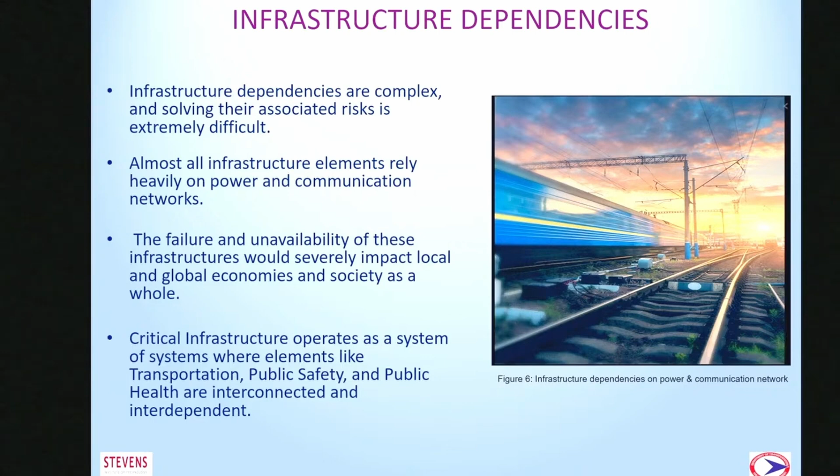For example, I was with the New York City MTA during the COVID-19 time, and I know that we all worked for days and days to make sure that transportation is still running—the subways are still running—because we had to transport the healthcare professionals. That was a very good example.

So what is meant by sustainable infrastructure? It refers to infrastructure projects that are planned, designed, constructed, operated, and decommissioned in a manner to ensure economic, financial, social, environmental, and institutional sustainability over the entire life cycle of the project. That is the key here—we are not looking for the short term.

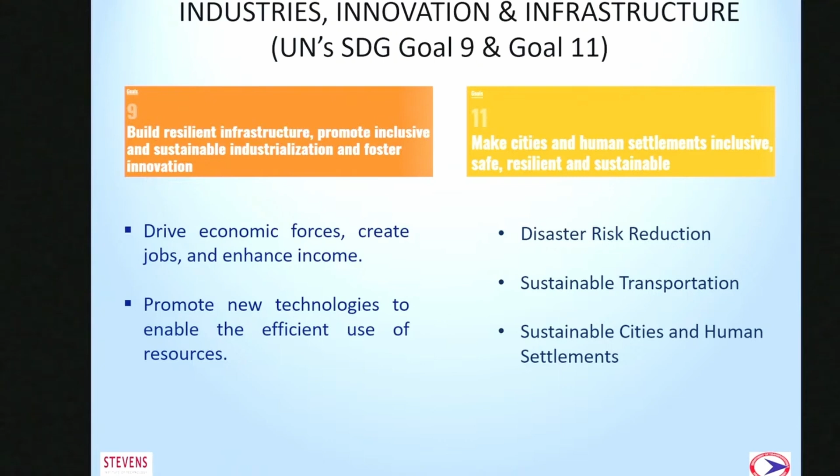Next, United Nations Goal 9 and Goal 11 are directly related to building sustainable and resilient infrastructure. Goal 9 guides us in building resilient infrastructure, promoting inclusive and sustainable industrialization, and fostering innovation. Goal 11 promotes making cities and human settlements inclusive, safe, resilient, and sustainable.

Next, let us take a look at how innovation and technology affect the infrastructure sector. Investment in infrastructure innovation drives economic growth. With over half of the population preferring to stay in cities, mass transit is really vital.

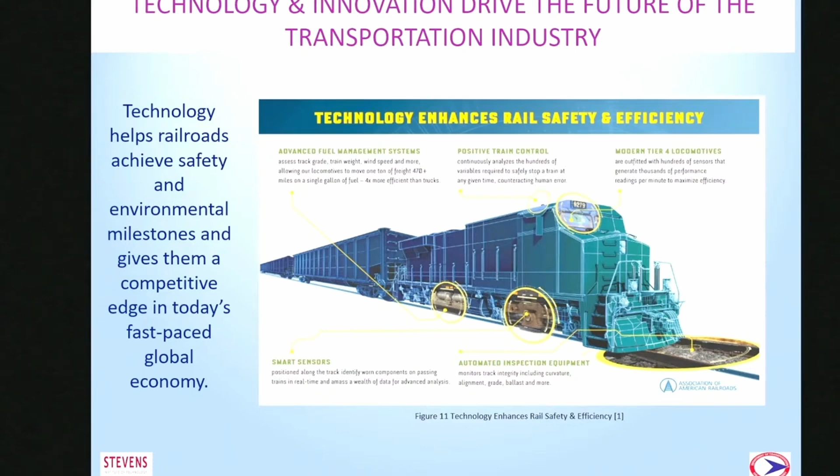To foster sustainable growth, cities must prioritize expanding public transportation and mass transit development. Especially metro and light rail projects are really crucial for sustainable urban growth. Rail is the most attractive option for a transport corridor. Population growth and the growing number of middle-income families who cannot afford to live in the city center make rail transport more desirable due to ease of accessibility, reduced travel time, improved quality of life, and reduced environmental footprint.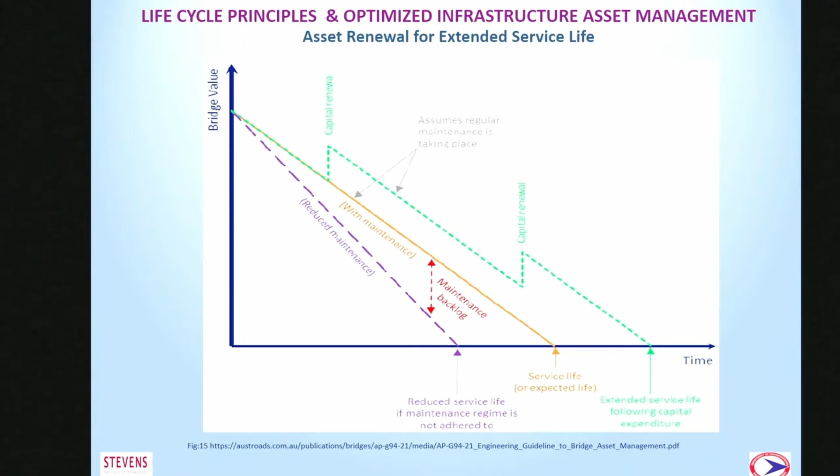Optimizing resources and funds has always been challenging, as everybody knows—funds are always limited. As shown in the figure, with an unlimited budget, there is a balance between performance, life cycle, and safety. But if funding is limited, then we are going to give priority to safety over performance and life cycle cost.

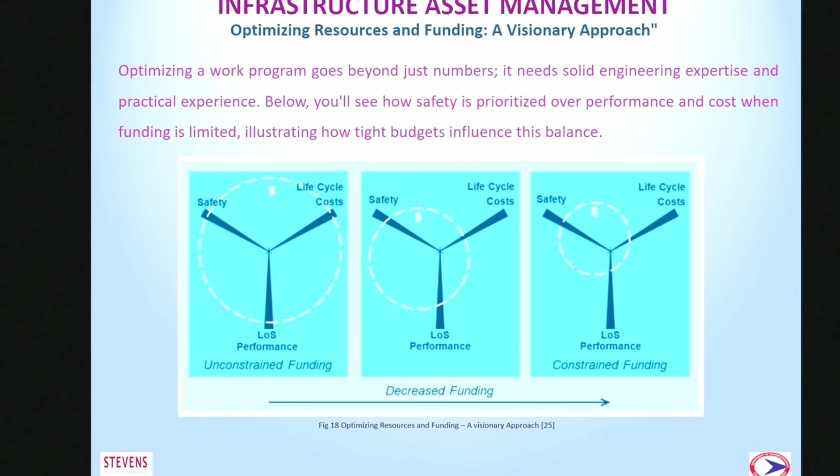I would like to touch on the research gap. I should mention I am just a first-year PhD student, so I've just completed my literature review, but I'd like to share what I currently intend to do. My research focuses on climate change impact on critical infrastructure and how we can harness the power of AI to build and maintain a sustainable and resilient system.

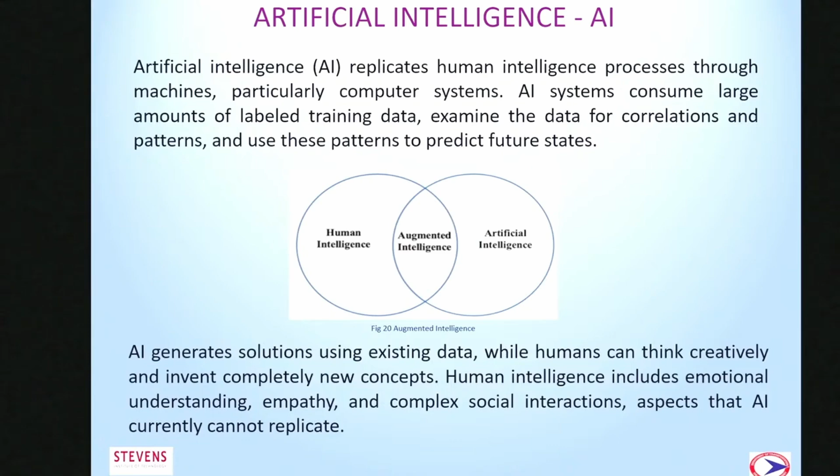Artificial intelligence mimics human intelligence by analyzing large amounts of data to find patterns and predict future states. While AI generates insights based on existing data, human intelligence can invent new concepts, showing emotional understanding, empathy, and complex social interactions. So we have to use both—there's no way artificial intelligence is going to replace human beings. That's not going to happen, because we still have to be in the middle.

Let us glimpse how an AI-based decision support system functions to reduce climate-related impacts on the infrastructure system. AI can handle a mass amount of data from multiple systems, such as GIS, GPS, IoT sensor data, intelligent transportation systems, weather systems, risk and mitigation data, and so on. The most challenging aspect is integrating all these systems together into the AI system to create a pool of data. Then AI will be able to help with decision-making in a very quick manner—humans may take weeks or months, but AI will do it in a very short time period, and also very efficiently.

AI can predict natural disasters like hurricanes, earthquakes, floods, wildfires, volcanic eruptions, and fires. And of course, if we know something is coming on the way, we can take absolute precautions. So this is a great feature that AI has.

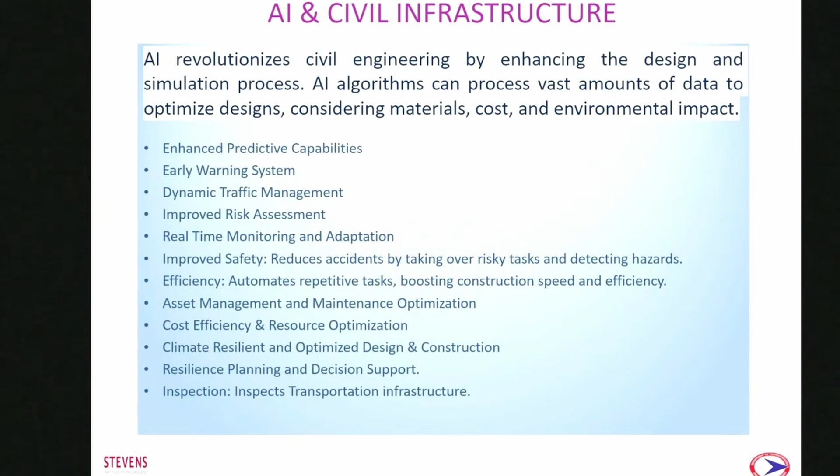AI revolutionized civil engineering by enhancing the design and simulation process. It has several features that help us reduce the impact of climate change on infrastructure: enhanced predictive capabilities, early warning system, dynamic traffic management, improved risk assessment, real-time monitoring and adaptation, improved safety, efficiency, asset management and maintenance, optimized maintenance operations, cost efficiency and resource optimization, climate resilient and optimized design and construction, resilience planning and decision support systems, and automation of inspection.

So my research questions are: what are the primary climate change factors affecting civil infrastructure? How do these factors impact different types of civil structures? And how can AI-driven techno-economic solutions mitigate the climate-based impacts on civil infrastructure, particularly for cost efficiency and sustainability?

I will be using both quantitative and qualitative data for hypothesis testing and exploratory analysis. Data collection may be in multiple ways: historical climate data, infrastructure performance data, a broad range of past events and their impacts, feedback from infrastructure professionals and stakeholder interviews, case studies, and surveys.

The impact I'm expecting from my study is that this research will offer invaluable insights, enabling policymakers and infrastructure teams to design and maintain sustainable and resilient systems with greater efficiency and effectiveness through the strategic application of AI.

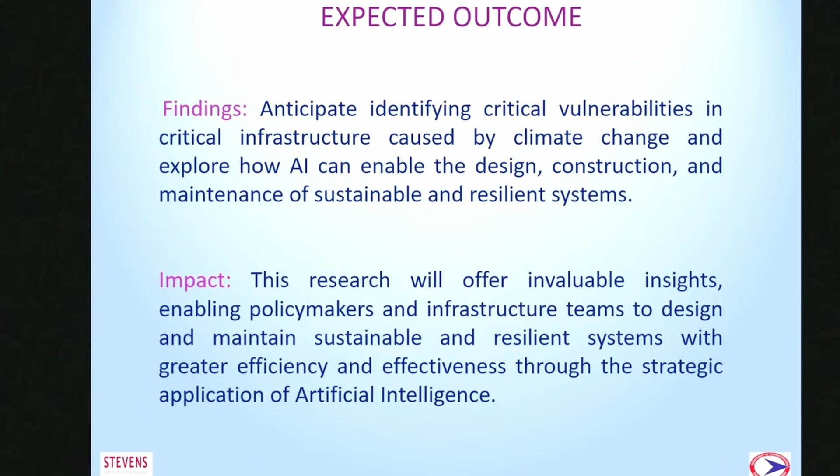I know that I was part of that, even for the congestion pricing projects for the MTA. I was part of the policy making discussions, so I know it's really challenging. Different scenarios need to be considered, and we want to make sure that we create a robust system and robust policies are there.

Information flow should be transparent and smooth, and communication and collaboration with multiple stakeholders is absolutely required. Mobilizing finance is everything, so we need to make sure that we have enough finance to implement it.

So the recommendations from my side are: get the fundamentals right, that is, get the basics right. That means enforce regulations, construction codes, and procurement rules. This is really important. And build institutions for resilience, create regulations and incentives for resilience, improve decision making, and finally provide financing.

In conclusion, sustainable and resilient infrastructure is essential for enhancing our quality of life, protecting vital resources, and driving economic growth. While the journey to developing a sustainable resilient system is really complex, the rewards are substantial. Building resilient infrastructure and fostering innovation are essential for our future. Today's efforts lay the foundation for tomorrow. Let us harness the power of AI to make our infrastructure smarter and more resilient.

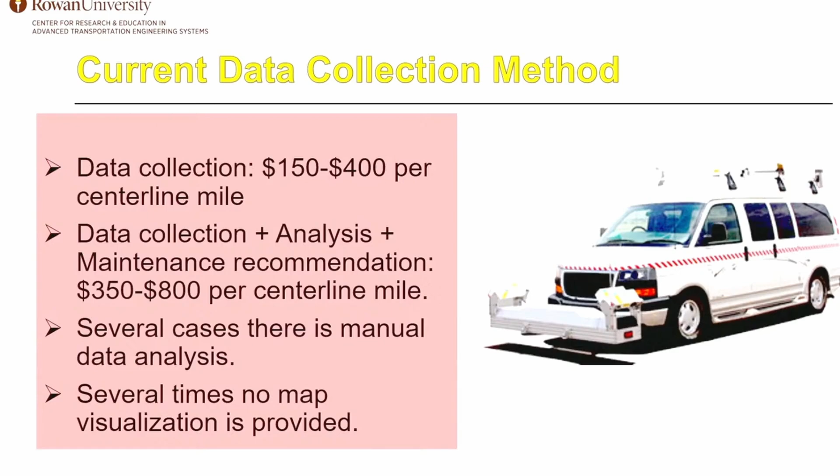In several cases, this data collection is mostly manual, and there is no map visualization for the entire road network. Also, certain small municipalities don't have funds to do this data collection, so they depend on a complaining strategy: whoever is complaining, whatever neighborhood is complaining, they will repair their road first.

Some municipalities, if they have a little budget, will send a crew to the roads and ask them to collect data, like how many potholes are there, how many cracks are there, how is the road condition. So doing this manual data collection is also kind of a safety risk.

So we came up with a solution that is based on AI. We are simply using a cell phone to scan the entire roadway and give the pavement distress. So it is quite affordable. Since it is a phone, you can attach it to any vehicle.

If it's municipalities, they can attach the cell phone to garbage trucks, which go every week. It will automatically scan the road and collect the data, and it gives everything on a map, showing how the condition is. I'll explain how we came up with this solution.

We are expecting to reduce the cost of data collection by about 90%. We are at about 80% right now, because of the cloud computing and stuff. So we are trying to target it to a 90% cost reduction.

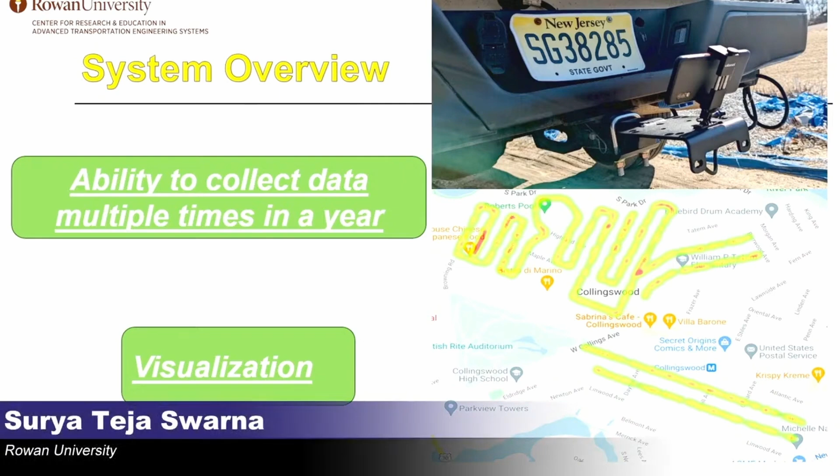Based on that, we can allocate some funding for the future to repair those roads, or we can preserve some of the roads — instead of repairing or reconstructing an entire bad road, we can allocate that funding to preserve some of the roads that are getting bad, and repair the bad ones at a later stage.

Another advantage of it is it gives a visualization, so it actually shows you where the distresses are in your particular roadway. And here is how we developed it.

Initially what we did is we attached this phone and recorded videos of each and every roadway in a municipality. We tied up with the Borough of Collingswood, so most of the research we did was in Collingswood. We recorded a video of the roadway and attached our GPS coordinates to it.

Then we used some developed AI models to detect the distress in images, and then we developed a PCI model. We use that PCI model to come up with the PCI. I will go step by step — there are 3 phases in total.

In the first phase, we initially collected the data — video data. So we divided that video data into frames. For example, if we are driving at 60 miles per hour, for every second we are getting about 60 frames.

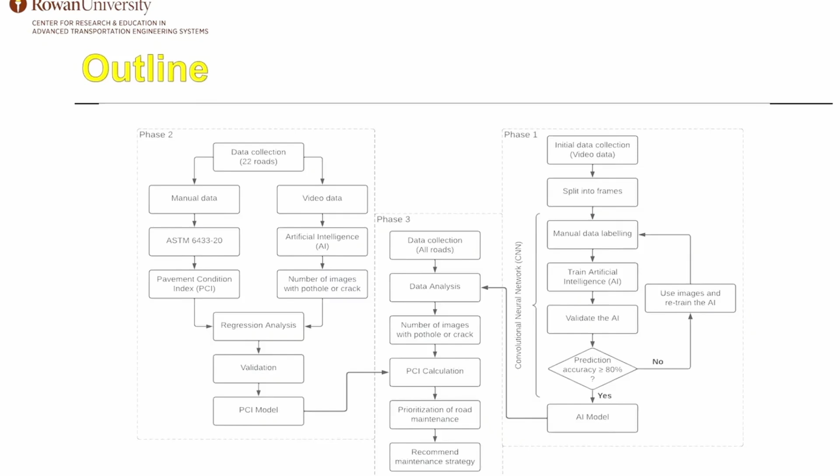And this is the whole data collection. We collected about 54,000 images, out of which 17,000 images we collected manually. For example, if we have a pothole, the phone is looking at a 60 degree angle at a certain height, but sometimes it may not look like that.

So that's why, for a pothole, we took an image in different directions, different angles, and different conditions. If it is wet, it looks different. If it is dry, it looks different. So we manually collected all those different conditions so that this AI could be implemented in any condition, any pavement condition.

We also have 36,000 images collected directly from the municipality using the AI. The phone resolution we used is 2K, and the frame rate is 60 frames per second, at a 60 degree angle, the major reason for 60 degrees being to collect 12 feet of roadway. GPS coordinates we collect every 200 milliseconds, and all these frames are attached with the GPS coordinates so that it can accurately show where the distress is on the map.

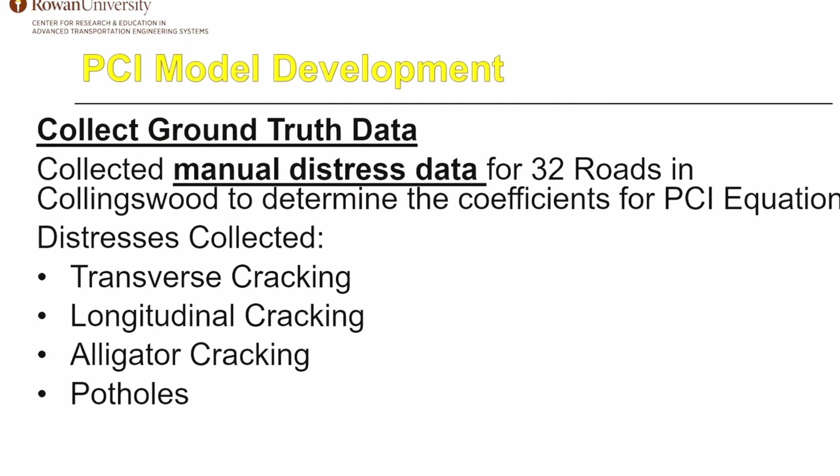So we use different architectures, all these are AI architectures. Out of which we came up with the best AI model, and we used that for our analysis. In the development of the PCI model, we collected the data and detected these distresses: transverse cracking, longitudinal cracking, alligator cracking, and potholes. We are trying to get more distresses as well, but for now we have only these 4 distresses.

Then we use ASTM standard to calculate the PCI. By using the AI output for the same roads, and the same roads with ASTM standard, we developed the PCI model. This is how the PCI model looks: it is a function of the number of images that has potholes and cracks, and both.

And when we look at the accuracy of this model, we collected different roads, manually calculated it, and then estimated the PCI using AI. When we look at the accuracy, it's too high. So then we had a thought: is it a generalized model? We will say definitely no.

The major reason is, as this data is mostly developed based on Collingswood, this is applicable to Collingswood, but there is some uncertainty in terms of pavement conditions. Because when we go to other boroughs besides Collingswood, we found they don't have proper lane marking, and they have more cracking instead of potholes. So because of this inconsistency, this model is not applicable outside Collingswood. But we made an effort to retrain our AI easily by collecting data in a new municipality, so calibrating this model for a different municipality is kind of easy.

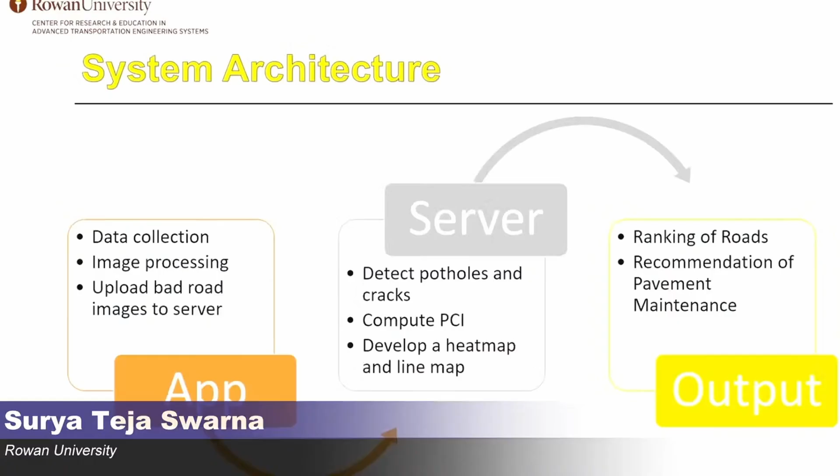Once we drive over, it will automatically collect the data. It is kind of video data. There will be a simple image processing technique in the cell phone itself, in the Android application, as cell phones cannot really compute much compared to the servers. So we simply use a basic model, good road, bad road technology.

How it works is, it will scan the roads, the frames that the application got, and divide it into two parts: good roads and bad roads. It is a basic application. If there is no distress at all, then it will consider it a good road. And if there is something, it can be a pavement marking, it can be a distress, it can be anything. If there is any obstacle, then it will consider it a bad road.

So this application will delete all the good roads and take all the bad roads to the server. On the server side, we have the AI algorithm to detect the potholes and cracks. Using those detected potholes and cracks, the AI will determine the PCI, and it will populate

on a Google map, on a heat map. If it is distress based, if it is PCI based, it is a line map. And then the output that we get out of it is a ranking of the roadway. So out of the entire network, which one to repair first, and what is the maintenance recommendation for it. So that is the output we will get.

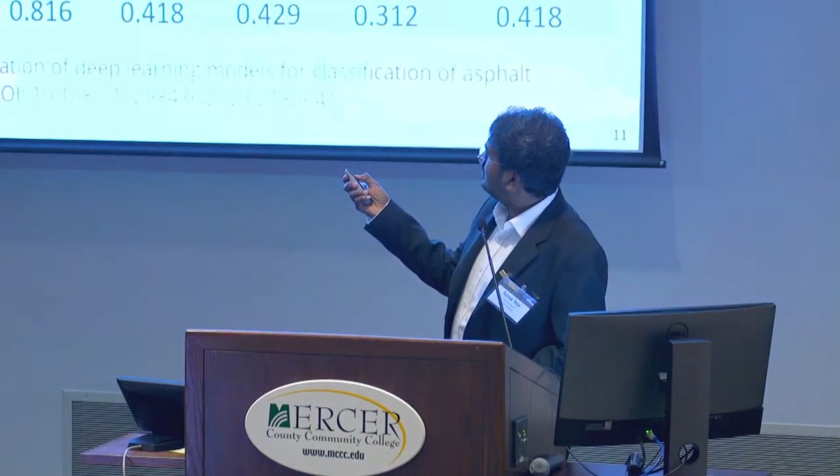Could that camera be put on the side of the vehicle to observe pedestrian infrastructure as well? Yeah, we are trying to do a similar kind of thing. We can definitely do that. But the main problem is at 60 miles per hour it may not capture all those details at higher speeds. But if it's a lower speed, it can capture it, yes.

So conceivably, theoretically, it would be possible to do this kind of surveillance work on pedestrian infrastructure to determine both its condition, existence, and how it's utilized. Honestly, all this technology we have already patented. We're currently working on patenting another one for sidewalk condition. We're almost done developing our system; we have a very basic one. Once we entirely develop it, we will patent it and then come out and do that.

Fascinating, thank you. Last question: since you are only looking at images, right now you don't have any data related to the dimensions of the distress, right? Yes, exactly, that's future work.